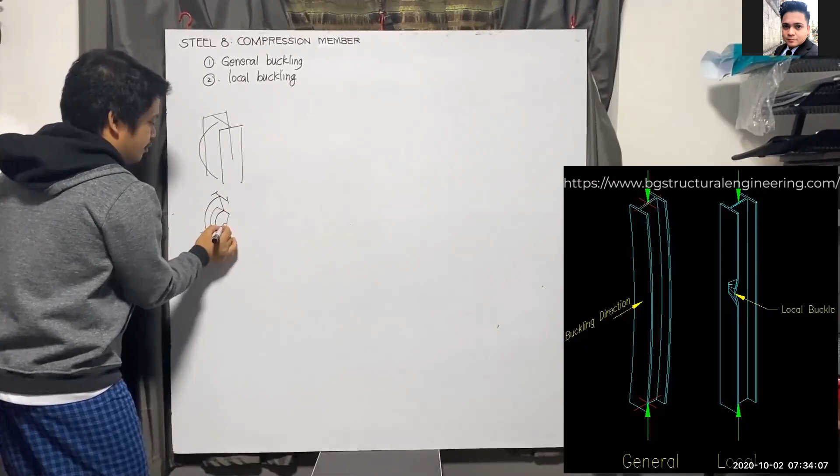Okay, so it already buckled. While in local buckling, sometimes it hasn't fully buckled yet, but part of the flange has already buckled. It means some elements already yielded, but not all the cross-sectional elements. So it's just part, that's called local buckling, just locality, unlike general buckling. So those are the two types of buckling.

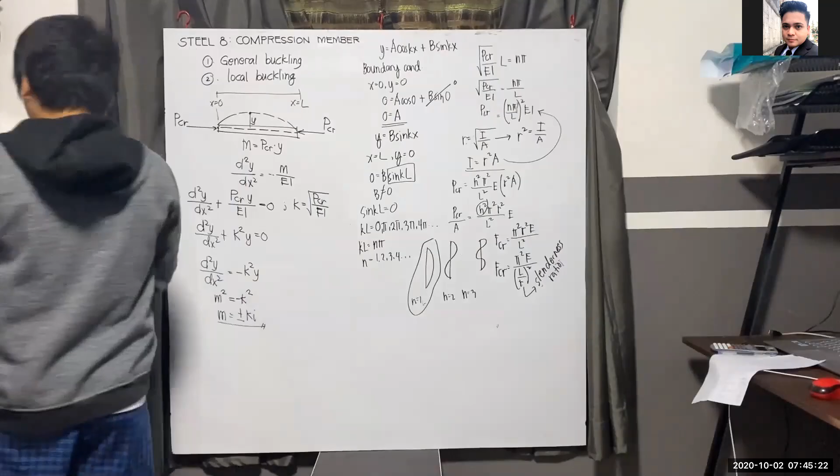Okay, actually ito yung ginagamit ni NSCP, yung FCR natin. Kaya lang, there is some modification value of K, which later on i-discuss natin. So ito yung dinevelop ni, ang tawag dito? Dinevelop yan ni Euler, kaya tinatawag yan is Euler critical buckling stress. So that is actually the stress on the member or on the column para magkaroon siya ng buckling. So we'll try to further analyze and discuss. For now, we have provided the formulation of the critical buckling stress because everything on the buckling is gamit tong formula na ito.

Question po so far? May question ba?

Okay, so that is the formulation of the critical buckling stress. So kapag tinanong sa problem or sa board exam, what is the critical buckling stress of the column, yan yung formula na gagamitin natin. Where L is the length of the column and R is the radius of gyration of the column.

So later on, we will be having those problems. Okay? However, this FCR is not always true, no? Sinabi ng mga scientists before na hindi naman talaga palaging ganyan, okay? So doon pumapasok yung ating code, okay?

So nagkaroon tayo ng dalawa. Kino-consider natin, inaalam natin based sa length ng column, okay? Ano ba yung column natin? Ito ba ay short column? Si Donna ba to? Short? Or is it long column? Si JP ba to?

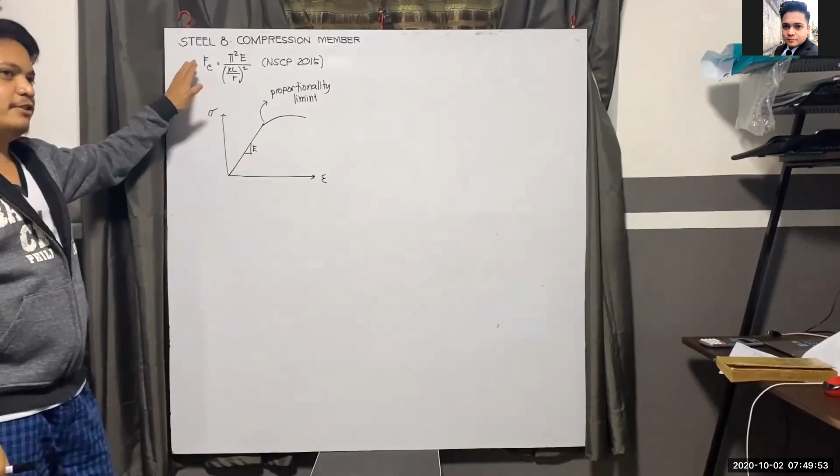Kapag daw yung stress na nakuha ng column, bago siya mag-bend, is mas mababa sa proportionality limit, in short, nagfo-fall lang siya dito sa region na to. Mas mababa yung stress niya kumpara dito sa proportionality limit. And then this one is called the elastic region, kaya ang tawag sa kanya is elastic buckling.

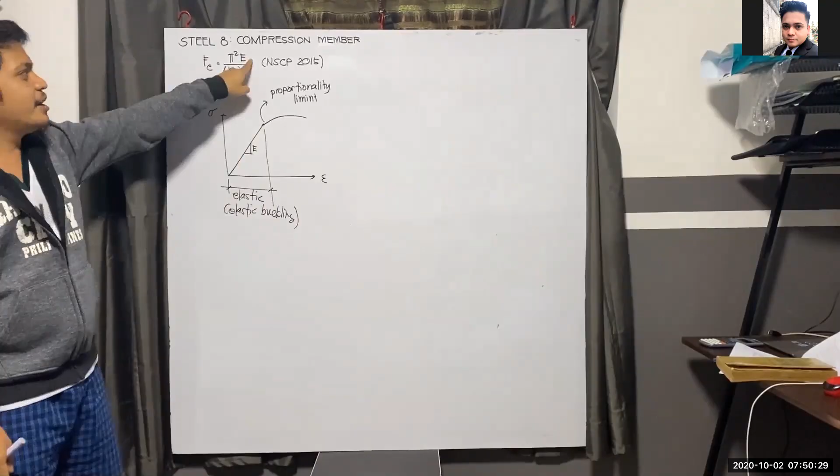So other researchers sabi, itong formula ni Euler na to, kasi E yung gamit niya, is only applicable kapag nandito sa elastic region, wherein nandoon yung E mo. How about kapag, nangyayari to kailan yan?

Let's say masyadong mahaba yung column mo, no? Parang ito kasing equation na yun is para sa mahabang column. Nangyayari lang yan kapag sa mahabang column, let's say yung ruler natin, masyadong mahaba. Ito na lang, okay, let's say sobrang haba niya, parang konting force lang, ano?

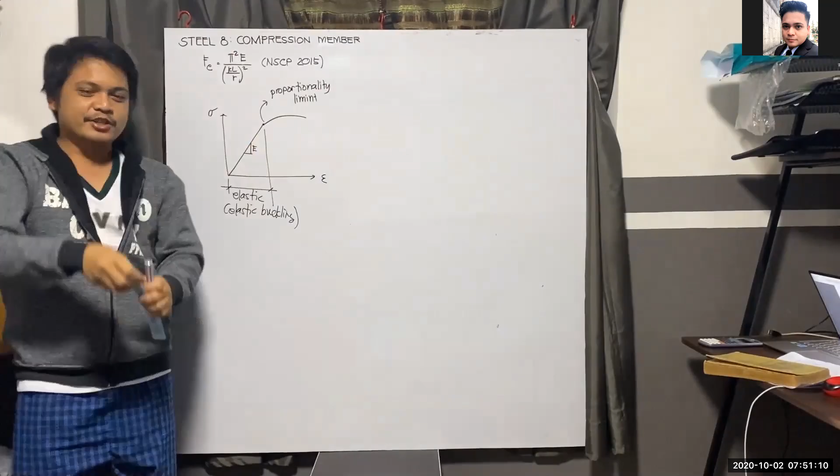So kung konti lang yung force niya, yung F over A mo doon, maliit lang yung stress mo, mababa lang yung stress mo, dito ka lang magpo-fall. So in short, applicable siya sa mga long column, kaya ito, tinawag siyang para sa long column.

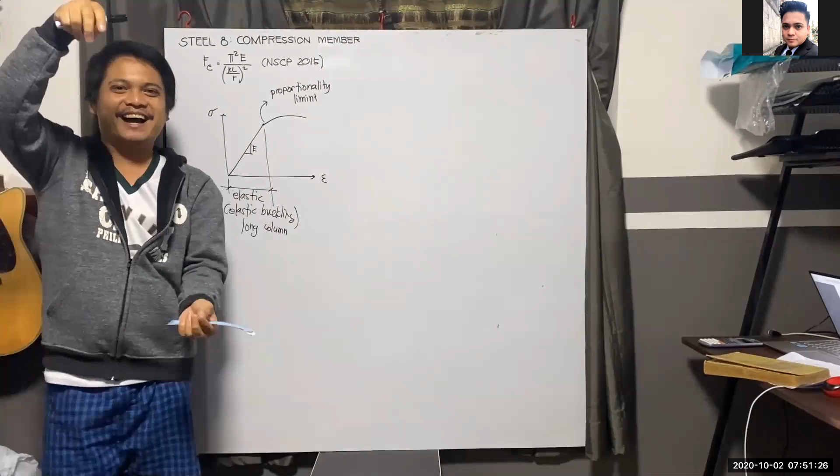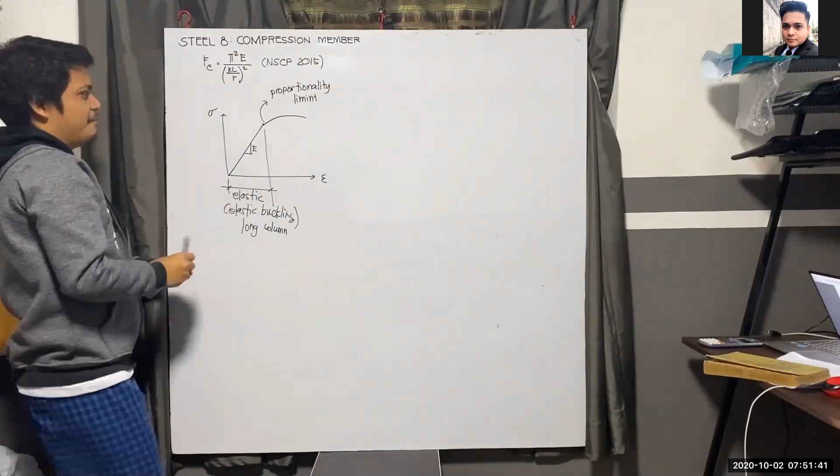Ngayon, kapag medyo pandak, parang ako, okay, pandak, bago siya mag-buckle, let's say sobrang liit nung column mo, tapos lalagyan mo ng load, bago siya mag-buckle, kailangan napakalaking stress muna yung kailangan mong dalhin sa kanya. In short, masyadong mataas yung stress compared dito sa ating proportionality limit, dito na siya nagpo-fall sa inelastic region. So on that, ang tinatawag sa kanya is inelastic buckling. And this inelastic buckling is applicable dahil sobrang lakas para sa tinatawag nating mga short column.

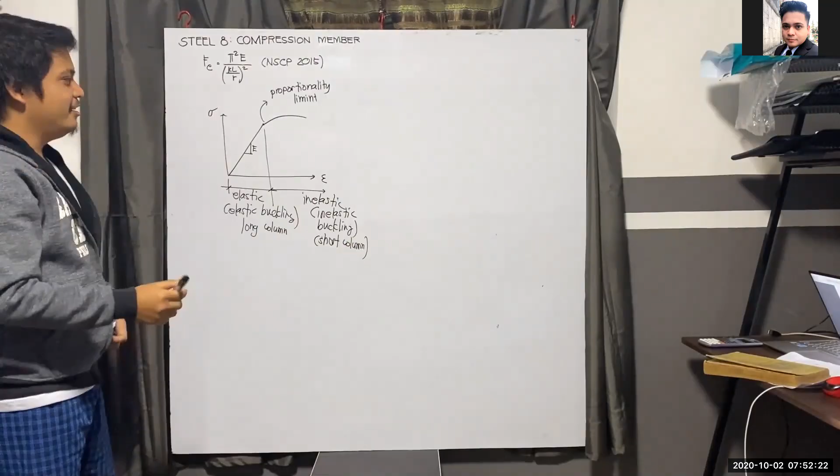Ngayon, nagkaroon ngayon ng problema. Itong formula ni Euler na to is only applicable for the long column. Paano gagawin sa short column? Eh hindi nga ma-determine yung E kasi non-linear siya, no? So ngayon, pumasok si Engesser. Si Engesser, siya yung sinabi niya, okay, at this point, let's say, nandito yung stress mo, para makuha mo yung value niya, tinatawag nating tangent modulus, or yung E sa T, no?

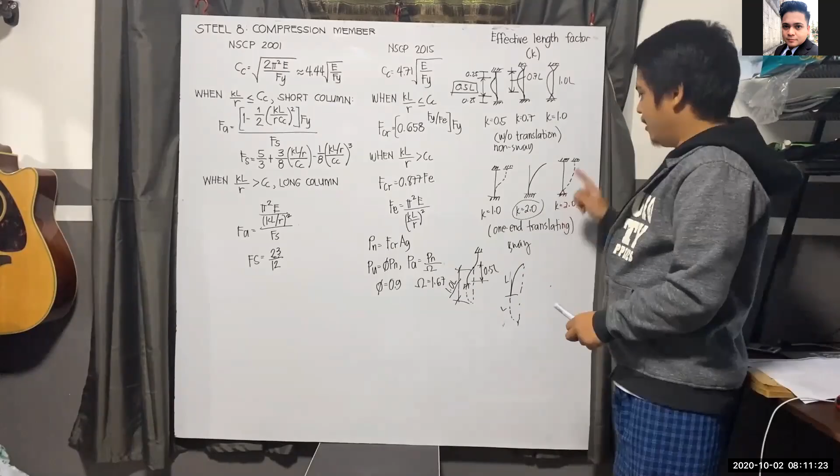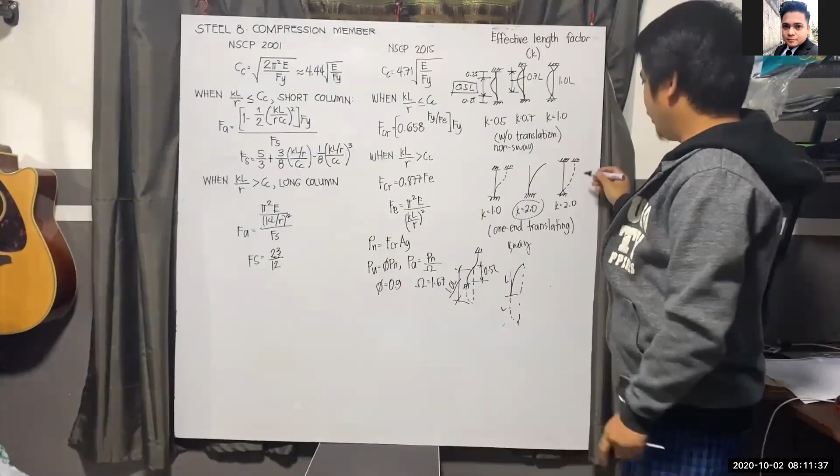So you have here the pin and then fixed. So magmumove na ganun, parang cantilever lang din siya, yung nangyari sa kanya. So same thing, ito para magkaroon, another L. So L plus L, so you have here the 2L.

So I guess that's for now, those are the concepts na kailangan natin matutunan. So sige, I will give you time to copy and then have the lectures on the compression members. Bigyan ko kayo ng 5 minutes break and then we'll proceed with the calculations afterwards.

Good morning, JP. Kakapasok mo lang, late ka na naman, pati dito late ka. Sorry, sir. Sige na, ano muna kayo, break muna and then we will proceed with the calculation afterwards.

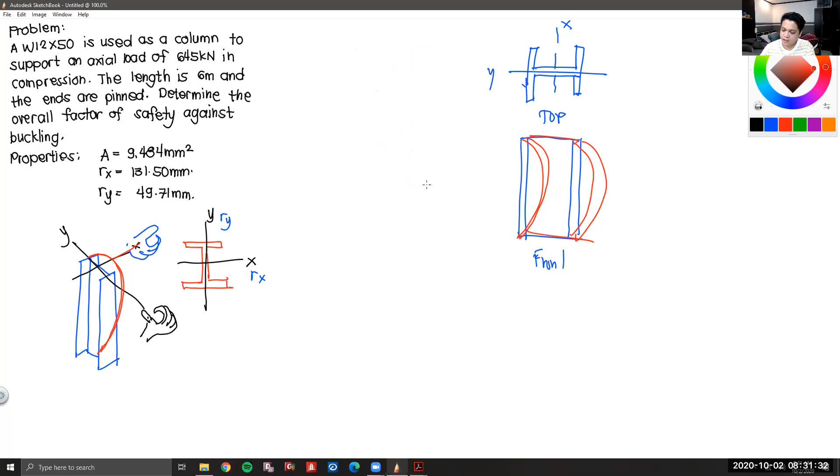Both axes, x and y. Now, what we need to check is the slenderness ratio itself. First, we get the KL over R. So solve for slenderness ratio, about x.

This is called KL over R on the x direction. Since the problem says pinned, the value of K is equal to 1.0. And then L is the length of the column that buckles.

So there are cases, for example. Good morning, Donna. There's Donna.

For example, we have a column, with a support there. Let's say this is our column. Support, okay? But when it comes to the middle, I already have a beam there. Somewhere at the middle, I have a beam. Again, this is the x-axis and this is the y-axis.

Now, the buckling on the x-axis - the buckling looks like this. So that means the whole length, if you imagine it, if this is the x-axis, it will bend like this. The whole length is what bends. So buckling about the x, our Lx is equal to the whole length.

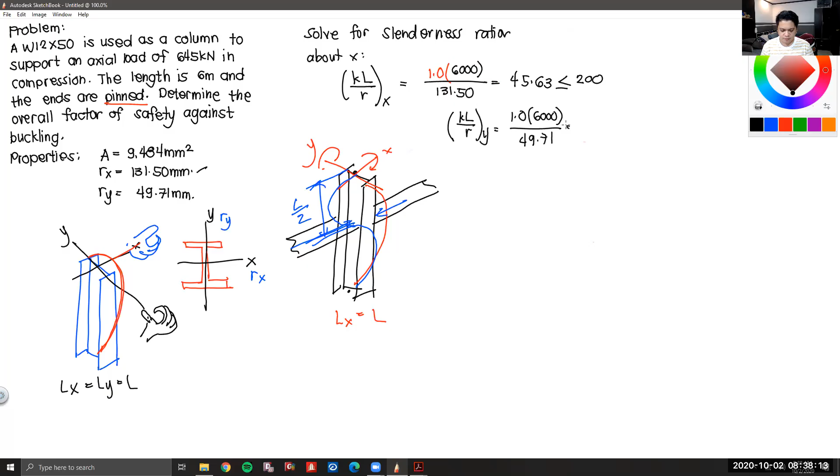Now let's check the y-axis, KL over R, Y. So 1.0 multiplied by 6,000, divided by the Ry of 49.71. That gives us around 120.70, again less than 200, so this is compliant.

Now, whichever is higher, bigger, that is the governing axis. What does governing axis mean? It means that's where it's prone to buckle - whichever has the higher slenderness ratio, that axis is more prone to buckling.

So, for example, this is the x-axis and this is the y-axis. The KL over R on the y-axis is higher, meaning it's more likely to buckle in this direction than the other. So the one we'll use is 120.70 - that is the governing axis.

Now, what we're asked here is the overall factor of safety. For overall factor of safety, this is capacity over the load. We have the load - our load is actually the 645 kilonewton. What we need to get now is this capacity, as against the buckling.

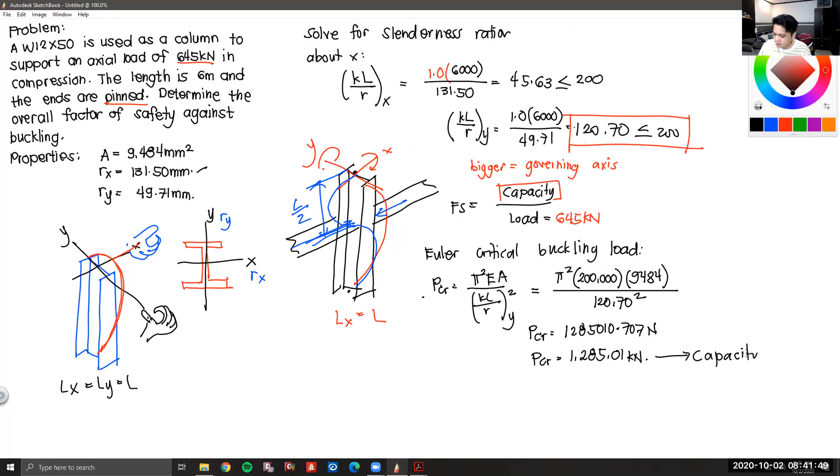Okay, that is your capacity. So to get for the factor of safety, that would be the capacity, 1,285.01, and then we divide it by the load of 645. So divided by 645, that's around 1.99. So this is now the factor of safety.

Kapag yung factor of safety mo is nag-less than 1, it means bagsak yun, ano? So dapat palaging greater than or equal to 1, para maging acceptable yung member mo. Okay, so minsan sa site, kuwari tinanong, engineer, pwede ba natin gamitin tong ano na to, size na to? Hindi minamata-mata, no? So maraming ganun na, pwede na yan.

Walang ganun. So kakomputin nyo, against the load and then yung capacity, so dapat mag-greater than 1. Kapag nag-less than 1 ka, ibig sabihin, bagsak yung member mo. Hindi mo dapat ipagamit yun, ano? Okay, sige, kopya, okay, save ko rin to.

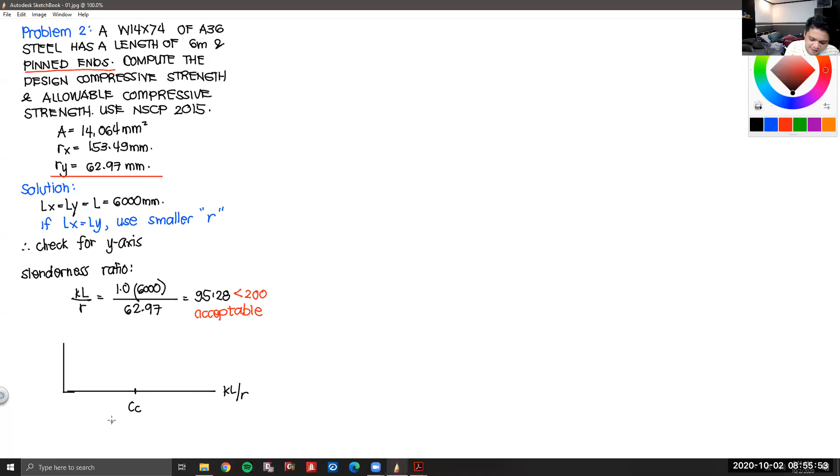Then you need to check. So sabi nga natin, parang dun sa graph natin, ano? Ibalikan ko lang yung graph. Okay, so this is the KL all over R, tapos i-check natin siya dito sa gitna. So ito yung ating CC, ano? Okay, so yung for CC natin, okay, for NSCP 2015, that's 4.71 square root of E all over FY.

Okay, so check natin yung CC natin for this one. So 4.71 square root of E all over the FY. Okay, so ang FY na gagamitin natin, walang binigay, 248. Okay, so let's check this 4.71 square root of 200,000 all over 248. So that's around 133.76. Okay, so dapat yung slenderness mo dyan, hindi lumagpas dyan para maging short column.

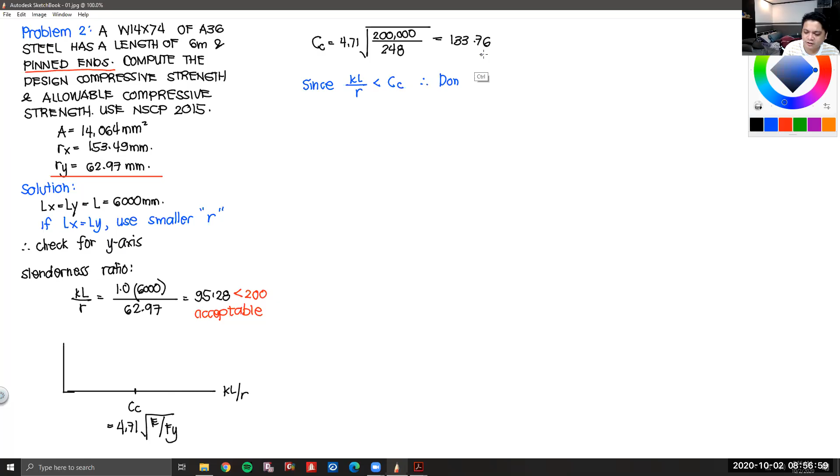Okay, so since KL over R, okay, KL all over R natin is less than CC. Okay, so this is a dona. Ay, short column pala, short column. So this is a short column.

Okay, so based on the NSCP, if this is a short column, ang gagamitin nating FCR. So again, this is called the critical buckling stress. Okay, anong gagamitin natin? So that's around 0.658 raised to Fy all over Fe, multiplied by the Fy.

Okay, so first, what is now the Fe? Kunin natin yung sub Fe. That is pi squared E all over KL over R squared. So we have here pi squared, E natin is 200,000, all over KL over R natin, that's 95.28 squared. So you will be having here the Fe. That's pi squared E all over KL over R 95.28 squared. Okay, so that's around 217.43.

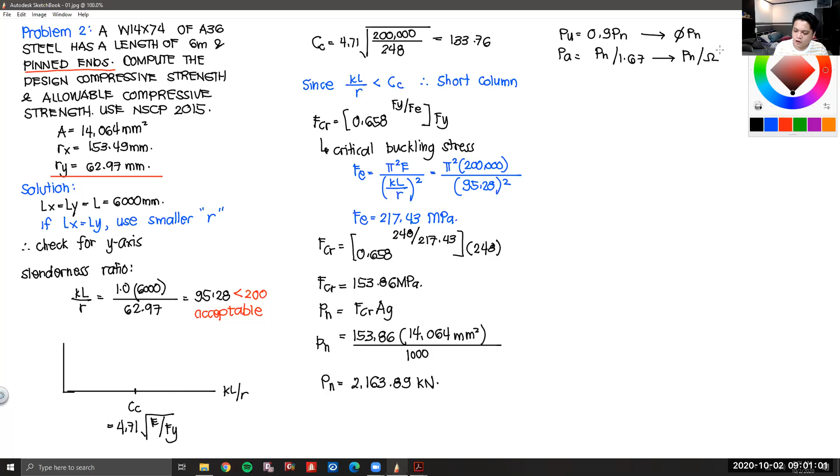Okay, so gagamitin natin dito yung factor, parang sa yielding. So we will use for the yielding, we will be having as PU 0.9 of P sub N, and PA equals to PN all over 1.67. So ito yung ating PU. Ito yung ating PN all over omega. Okay, so for the LRFD method, okay, so this is the design strength.

Okay, so we will be having here PU, so 0.9 of PN. So we will be having PU 0.9, ang PN natin is 2,163.89. So solving for PU, that's around 1,947.50. Okay, and this is now in kilonewton. Okay, so here is the answer for the design strength.

Okay, so punta naman tayo for the ASD. So this is now the allowable naman, ano? Allowable strength. Okay, so we will now have PA, so that's PN all over 1.67. So that is equal to, ang PN natin, 2,163.89 all over 1.67. So you will be having here the PA, so that's around 1,295.74 kilonewton. Okay, so this is now the answer.

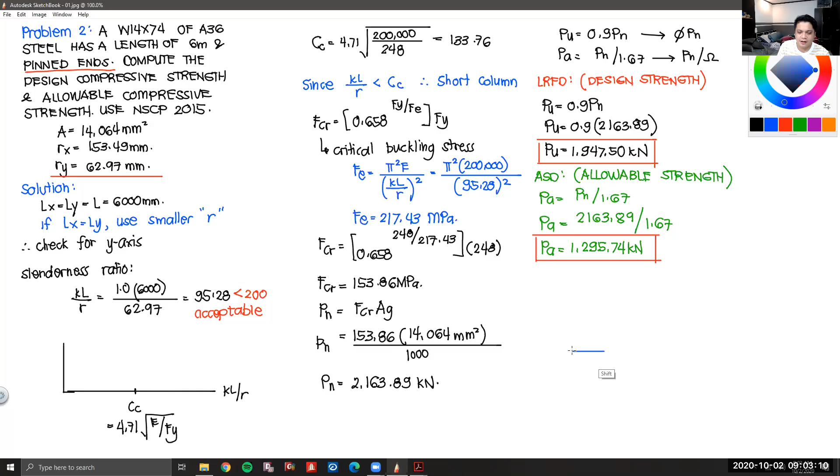Okay, so we have the allowable and then we have the ultimate. Okay, so ito yung capacity, no? So kung matatandaan nyo before, okay, nung kayo ay grade 6, nagme-method of section kayo, di ba? Nagme-method of joints kayo dati. Tapos, di ba may mga loads yan? Pinapakompute sa inyo yung mga bar forces. Tama ba ako? Okay, so let's say itong bar forces nyo to, let's say AB. Compute sa inyo, di ba? Bar force AB, let's say nakuha mong bar force AB.

1,000 kilonewton, ayan. Nilalagay nyo pa nga ganyan eh, compression, di ba? So ito yung galing sa loads. Okay, you need to compare this one dun sa atin, it's either allowable or ultimate. Okay, so dapat laging mas malaki yung capacity mo kumpara dun sa mga loadings mo, no? Para maging safe siya. Okay, so again, yung kino-compute nyo dati sa theory of structures, lahat yon is the load based on the loads. So ngayon, ang kino-compute naman natin is capacity naman ng members. So dapat yung mako-compute natin palagi, mas mataas yung capacity over the load.

So pwedeng sa exam, okay, for example sa exam, nagbigay ako ng truss, ng loadings. Tapos pinapa-design ko to. Kaya lang ang lumabas dito, 1,000 kilonewton sa tension. Let's say tension. So ang gagamitin mong pagkuha ng capacity, yung topic natin noong nakaraan. So how to compute for the tensile capacity. So dapat mas malaki yon kumpara dito. Okay, or ipapadesign ko sa inyo, di ba? Meron tayong design, given the loadings, ito yung loadings, hahanap ka ng section na mag-save doon sa loadings. Okay, so ito yung kinocompute natin. Kung bakit natin siya kinocompute is to compare the capacity to the loadings. Okay, so sige po, kopya muna and then we'll proceed with the next example.

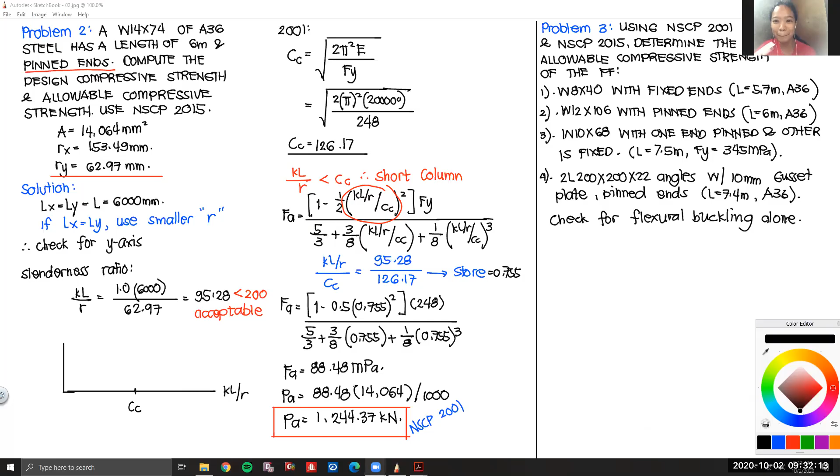Alright, ayan, mukhang kumakain na si Donna, oh. Ano yan, Donna? Di ka namimigay. Almusal ko po, sir, gulay. Okay. Ang cute ng bill ko, oh. Ay, hindi niya kita, 28 sa Meralco. 28,114. Napaka-cute. Then sir, 10 lang, hindi. Nagtatlo kasi nasira yung kontador, pinalitan nila. Ngayon ang dumating lahat, 3 buwan, sir. Masakit sa puto. Okay, so anyway, let's proceed.

So using NSCP 2001 and 2015, determine the allowable compressive strength. Uulitin ko ha, yung mga terms natin. Allowable, anong gagamitin? ASD, LRFD? ASD po, sir, ASD po. Okay, iyan ang clue natin na allowable kapag design, LRFD naman siya. So we will be having here for the NSCP 2015 and 2001. So nahin muna natin, so we will be having here 2001 NSCP. Again, for the problem number 1.

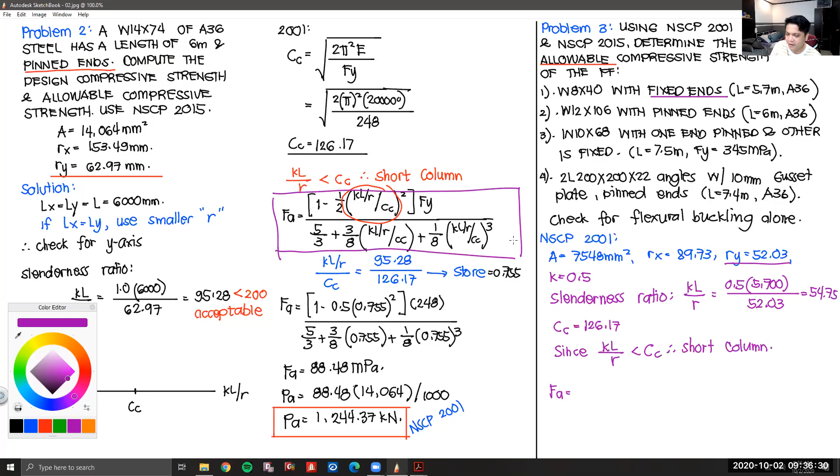So since KL all over R is less than CC, then this is DONA, or this is a short column. So gagamitin natin kapag short column, we have now the FA. Itong formula na to, ayan yung formula na yan, yung mahabang mahaba. Siyempre, para maano natin, kailangan ulit-ulitin natin, repetition. So walang tingin doon na, sige nga, tingin ka sa kanan, tapos i-recite mo. Hindi pa kabisado, okay lang.

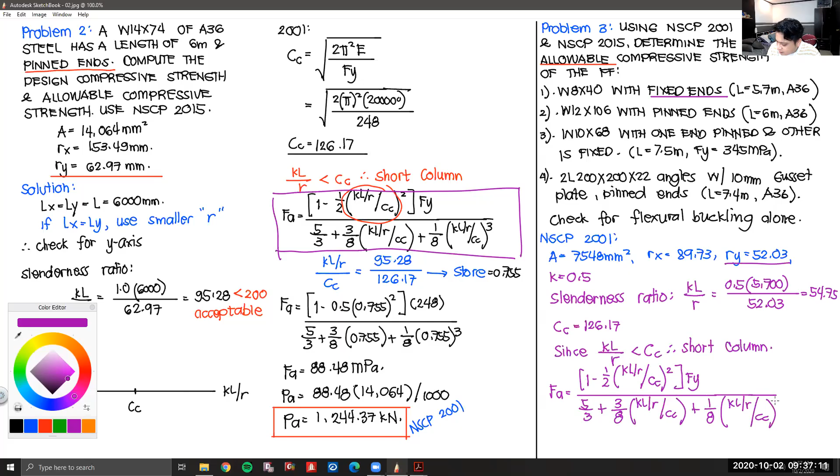So we will be having here as 1 minus 1 half KL all over R over CC squared, multiplied it by FY all over factor of safety, 5 over 3 plus 3 over 8 KL all over R over CC plus 1 over 8 KL all over R all over CC, and then that is in cube. Okay, so delete muna ako.

Okay, next. To solve for the FA, we first store the values of KL over R over CC. So KL over R over CC, that is equal to 54.75 over 126.17. So that's around 0.434. Okay, store.

So we will now have the value of our FA. 1 minus 1 half KL over R over CC squared, multiplied by FY, times 248 over 5 over 3 plus 3 over 8 KL over R over CC plus 1 over 8 KL over R over CC cubed. So you will be having here 122.12 megapascal.

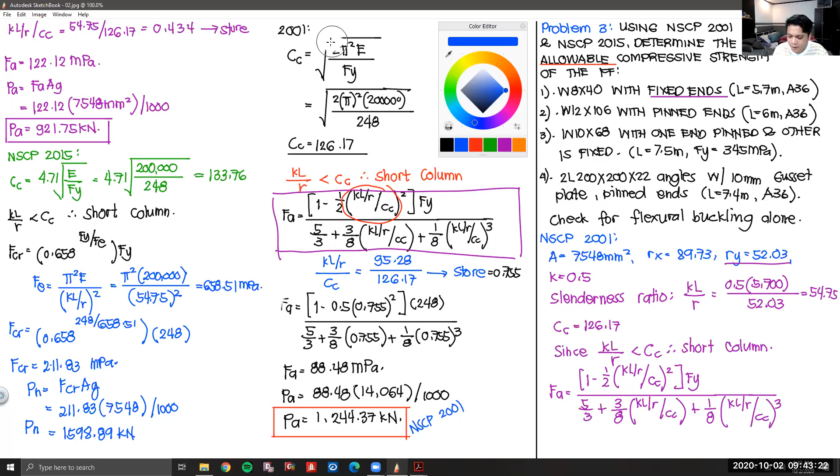Okay, so we will now have the value of P sub n, that is equal to FCR multiplied by the area gross. So that's 211.83 multiplied by 7,548. I'll divide by 1,000 to make it kilonewton. So you will be having the PN, 211.83 times 7,548 divided by 1,000, that is equal to 1,598.89 kilonewton. However, what we need is allowable.

So we need to divide it, since we want allowable. So we have PA equals to PN divided by omega, wherein omega is equal to 1.67. So you will be having PA equals to 1,598.89 divided by 1.67. So you will be having here 957.42 kilo.

Okay, so try to compare the PA of NSCP 2001 and the NSCP 2015. As you can see, the NSCP 2015 gives more capacity compared to NSCP 2001. So the 2001 is more conservative. So in short, if you are going to design sometimes using NSCP 2015, the sections are smaller compared to NSCP 2001.

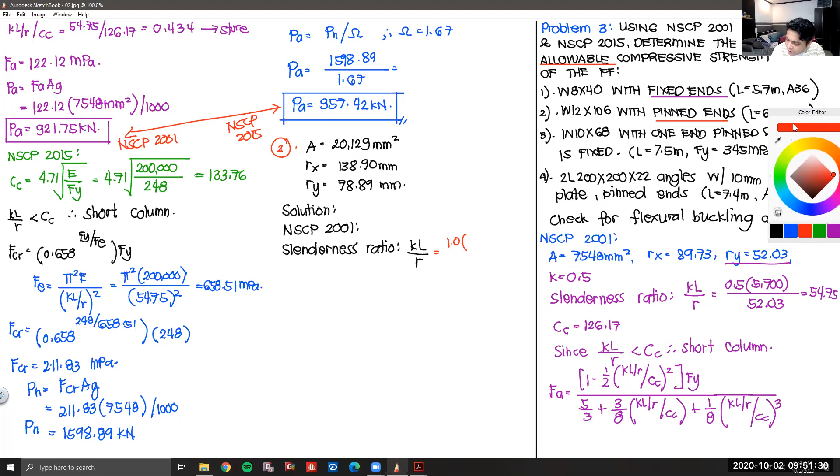Okay, so since given is we have pinned-pin ends, our K is 1.0. Our L is around 6 meters, so 6,000 over. Again, what I will use, since LX and LY are the same, I'll just take the lower one, that's around 78.89. So you have slenderness ratio equal to 6,000 divided by 78.89, so around 76.06.

Okay, so for NSCP 2001, this is less than 126.17. So this is a short column.

Okay, so we will be having our FA. So for the FA, let's first put KL over R over CC. So that's around 76.06 divided by 126.17. So 76.06 divided by 126.17, that's around 0.603.

Okay, and then store. Okay, let's get the value. So we will be having here our FA.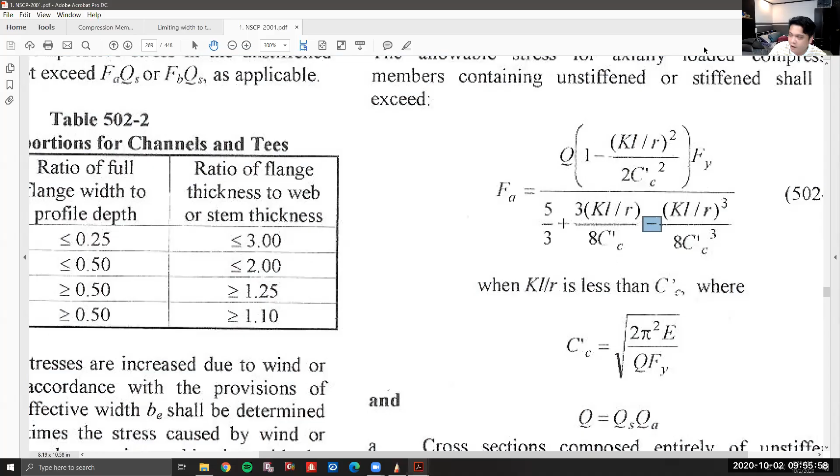1 minus 1 half KL over R over CC squared times FY, this is the factor of safety. 5 over 3 plus 3 all over 8 KL over R over CC minus, okay please change it all, minus KL over R over CC cube 1 over 8. And this is our CC, 2 pi squared E all over FY. Don't worry about the cube yet, I'll explain that later.

Alright, so I just noticed now, minus 1 all over 8, cube. Okay, so you now have the FA equals to 108.79.

Okay, so let's change that. Alright, so after we get FA, after we get FA, we need to solve now for the PA.

So that is FA multiplied by the AG. So we will have 108.79 multiplied by the AG, 20,129. Divide by 1,000 to make it kilonewton. So you will be having this one times 20,129 divided by 1,000, so that's around 2,189.90 kilonewton. So this is now the answer for the NSCP 2001.

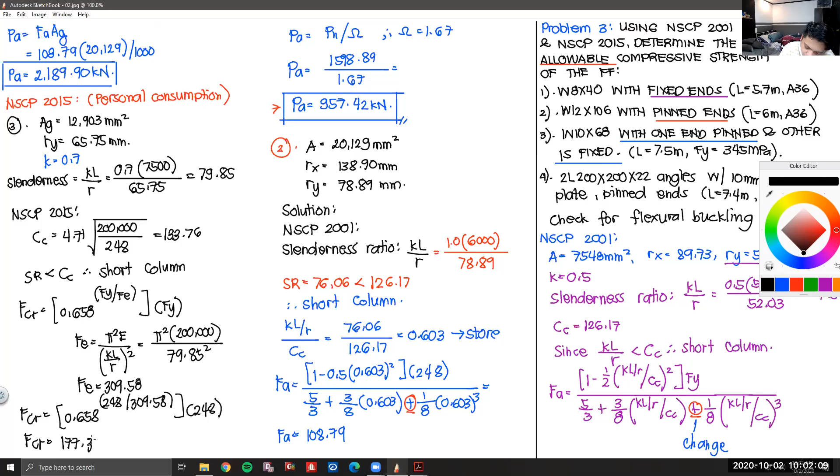So you will be having this one, pi squared E all over 79.85 squared, or that's around 309.58. Okay, so we will now have the value of FCR equals to 0.658 raised to 248 divided by 309.58 multiplied by 248. So FCR, 0.658 raised to 248 all over 309.58, that's around 177.35 megapascal.

Okay, and then solving for the value of Pn, so we will be having here the Pn equals to FCR multiplied by Ag. So 177.35 multiplied by the gross area, 7548. Divide by 1,000. So we have now the nominal, 177.35 times 7548 divided by 1,000, so you will be having...

1,338.64 kilonewton. Since allowable is what we're looking for, we will be having here Pn all over omega, or that is Pn all over 1.67. So 1,338.64 divided by 1.67, so that would be your allowable, 801.58 kilonewton. Alright, so this is now the answer for number 3.

And for the NSCP 2001, that's personal consumption.

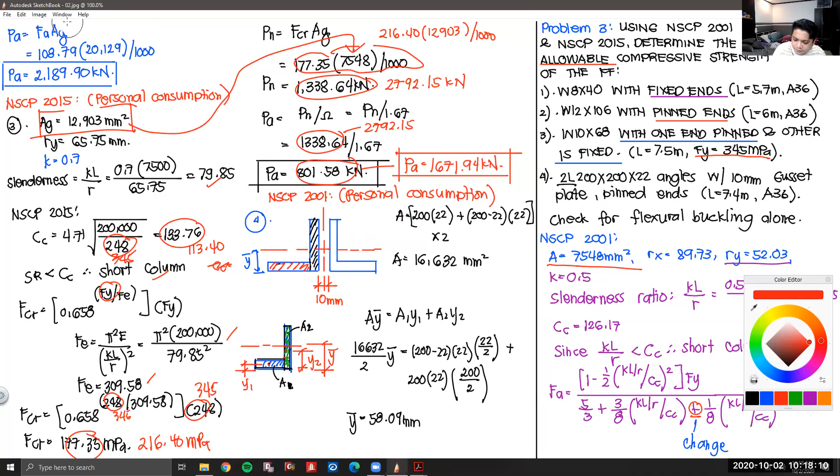Again, if that is the case, and then this one, okay delete ko muna. Kailangan kasi natin makuha yung Rx at saka yung Ry niya, di ba?

Para makuha natin si Rx and then si Ry, pupunta tayo sa square root of I all over the area. Yung area, meron na tayo. So we will now have the area. Ang wala na lang tayo is the value of I.

Unahin natin si Ix. Originally, nandito yung I niya. So this is now your Ix. Diyan din napunta, yung single I nito.

So yung area 1 is, again, BH cubed all over 12 plus area, BH multiplied it by Y bar minus Y1 squared. Okay, iyan yung I plus AD squared. Kung still remember niyo yan.

Yung I ng maliit, we have here ito. Dalawang area pala yan. Sige, iyan ako na to. So this is 200 minus 22, ito is 22. Tapos yung isa is ito, ito yung 22, ito yung 200.

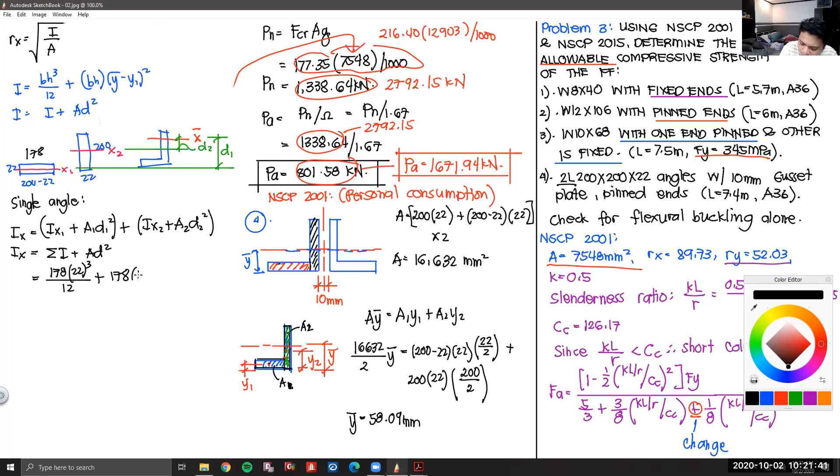So that's 1, BH cube all over 12 plus the area, 178 multiplied it by 22. And then yung distance D1, this is actually the bar X.

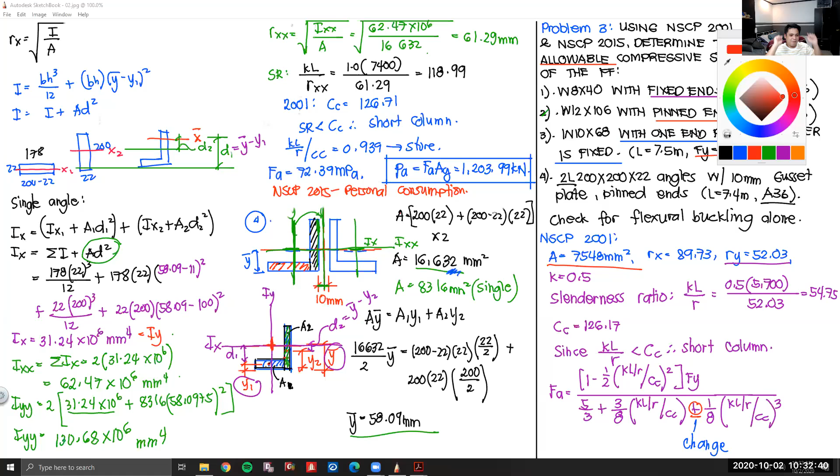Okay, kopya muna, sige. So yun yung nakikita nyo sa bubong na madalas, di ba? Magkapatong na ganun yung dalawang angle bar. Okay, mukha lang siyang madali gawin, pero sa computation, mas mahirap siyang gawin.